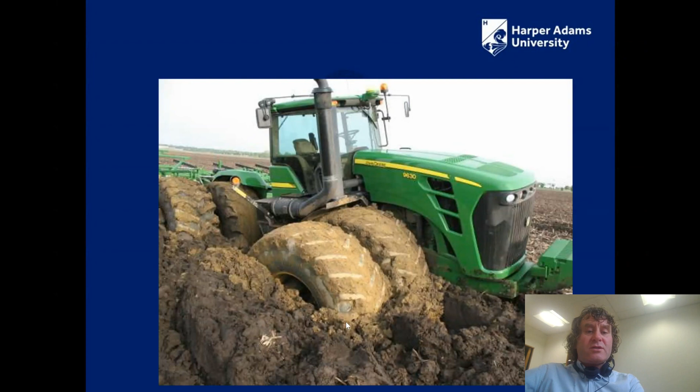Really, it's the soil, the first 20 centimeters of the soil, which are full of life and nematodes and carbon and nutrients, which are giving the plants the required nutrients in order to live and thrive, which we then eat.

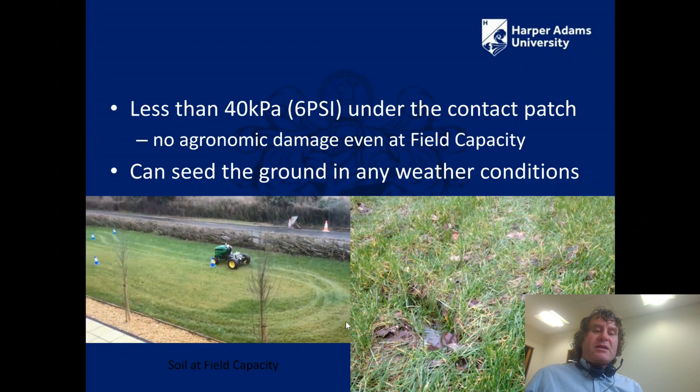So a project we started back in about 2015 was to get small light tractors. This is a lawn mowing tractor, and you can see some students on the left-hand side. They are master students who made this tractor radio controlled, which was the first step to show that it's dexterous.

The step after that would be to put on a computer system to make it drive around autonomously. And the whole idea of having no driver on the tractor is to reduce the weight.

You can see that if a person steps on a field, you've got a very flooded footprint. This is on the grass just down below. The field here is at what we call field capacity - in other words, it can't take any more water. Whereas the tire track from that tractor hardly makes an indentation in the ground. So it's not damaging the ground as much because its mass is distributed over 4 low pressure tires, and there's the reduced weight of the driver.

Taking this project a step further, some colleagues at Harper Adams made a field which was exclusively farmed by robots. Now, the people who made this project were extremely good at publicity and social media. So what they did was they really pushed the fact that there was no humans allowed in the field and that they were going to grow a hectare of crop completely autonomously. And that was the bit that really grabbed the headlines.

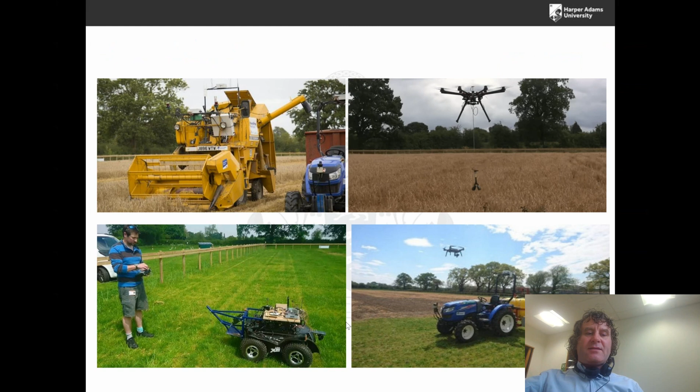Now, the technology behind all of this was actually very, very simple. So the students and the researchers used the ArduPilot system - something you can get quite cheaply to fly drones. What they did was they put an ArduPilot system onto a tractor, and then onto a combine harvester, and they demonstrated that it could drive the vehicle. So we can see video of this driving along.

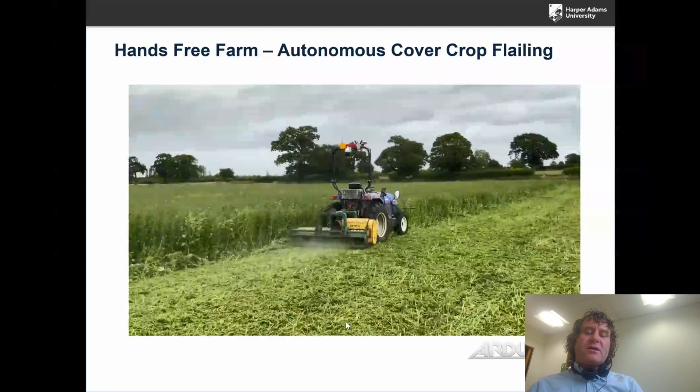Now, I wasn't involved in this project because it was very simplified. It didn't really use robotics. What they used was to take motors and put them in place of the steering, and a motor in place of the gas pedal to change the speed of the tractor. It's simply an ArduPilot system, which is using Mission Planner to navigate its way around.

It's very limited in that it thinks it's a flying drone. It can't do anything else. So if there's obstacles in the way, it can't do dynamic obstacle avoidance. It can't test if its fuel is low and do something about it. It is purely navigating. But there was a good lesson to be learned from this.

Really, most of the problems of technology is convincing the general public that it will work, and the general public is not interested in the technology behind it. They are just interested in what actually happens. So it was an interesting lesson - my approach would be to use robot operating system and to have the whole system with laser scanners for object identification and path planning, etc.

But that takes a long time. This was built up in less than a year in order to use the crop to go with the growing cycle, and it really took the world by storm. So the system was very simple, it had many limitations. I, as an engineer, only saw those limitations, but the public were convinced that robots could farm.

And you can see here that the impact was amazing publicity as well. And from that publicity, they could then go on to apply for more research grants and make more complicated tractor systems. So this is the next generation.

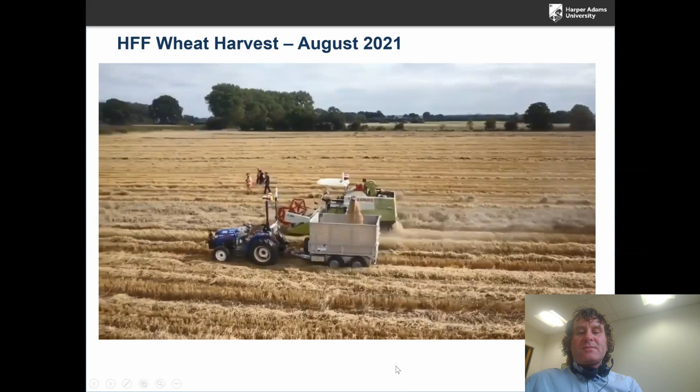They've moved away from ArduPilot, but they did use a company which created the auto-steer system, called Trimble. You can see there are two autonomous vehicles working side by side, in constant communication with each other, and you can see that it does work, and they've got more outputs.

One of their philosophies was, how can we get around the legislation? There was legislation forbidding the use of autonomous tractors because of health and safety concerns. So rather than putting lots of safety systems onto the tractor, they built a big fence around the area. Their philosophy was, let's do it now and apologize if we've made any mistakes later.

We found that legislation can really be changed by doing things anyway. If the public are on your side and enough people see it actually happening, that can be a good springboard for changing legislation. So rather than waiting for legislation to change and then doing it, get the public on board and get the legislation changed by sheer publicity.

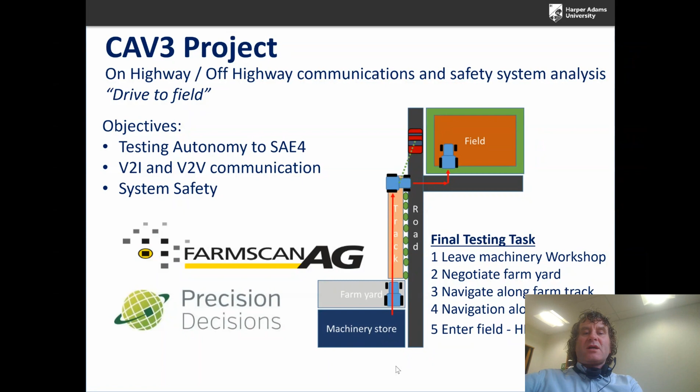That project has gone further. The CAV stands for Connected Autonomous Vehicles Project, and that has now been taken to a tractor that can drive itself from a machinery store down the road and into the Hands-Free Hectare field. You can see a short video of this vehicle moving.

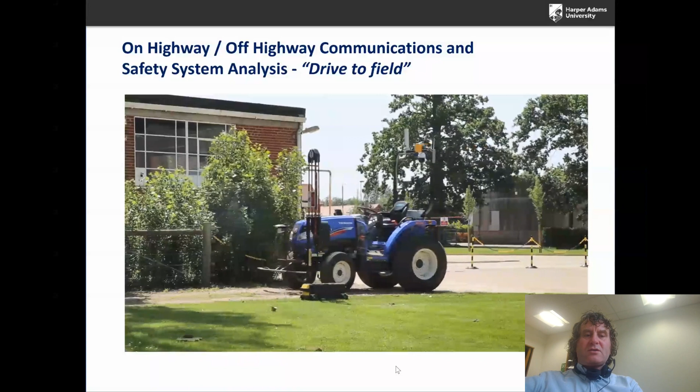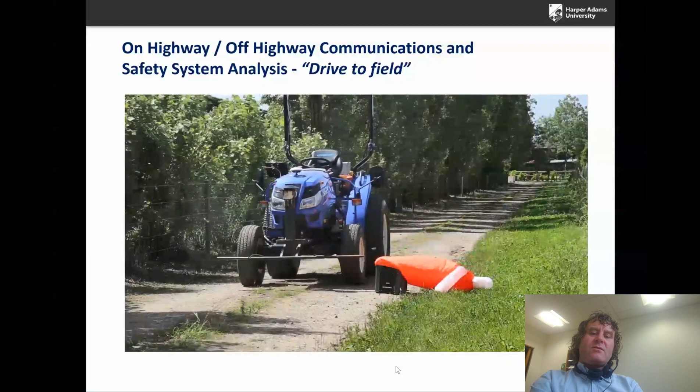Again, this is using third-party hardware and software to drive. It's using GPS points to drive around. It has RFID connections to the barriers, which raise and lower, and now it has a laser scanner as a safety system. So if there's a person in the way, it slows and then stops the tractor, and when the person is out of the way, the tractor carries on.

It's all built up in layers of safety which stop the tractor: a layer of GPS coordinate following, and a layer of implement activation. Each one is a separate system with communications to the system below it. And you can see that it can now enter the Hands-Free Hectare field by itself.

Incidentally, this field is now our agri-living lab, which I mentioned before. So we've now connected it up.

Something we're very proud of at Harper Adams is we're involved, and we've collaborated with a company called Spray Drone. The drones are from XAG in China, and we're actually running the country's first spray drone pilot course, so you can learn to spray and pilot a drone at the same time.

Current legislation stops us spraying chemicals and glyphosates from a drone in our country. However, it's not stopping us spraying water, so we can test it out with water. We can test spraying indoors as well, in our large soil hall where we can test that out.

We can also release seeds, sending them into environments which are very difficult to seed, for example on mountainsides. So that's something that's currently being used. I've just gone through the drone pilot training myself, and it's a useful qualification to have.

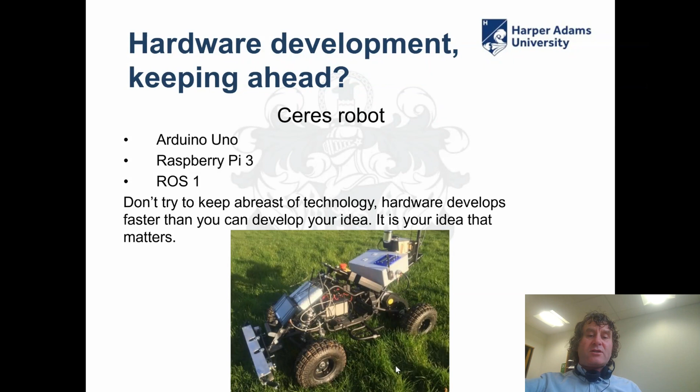Trying to keep abreast of software and hardware, if you try doing that, you won't build anything. So at one point you have to say, right, we're sticking with this technology, and that's the technology we will use.

So many of you might be thinking of mechatronics and robotics and how can we make an impact in agriculture? Well, the bit I'd like to get across in the next few slides is that machines can be very simple and do very simple tasks, and that can save the farmer and the public a lot of money and a lot of effort.

For example, if you have a spray machine and it gets windy, a driver has to stop spraying and go home. But if you have a robot which is spraying, it can sense when it's windy. If it's too windy, it can stop. If the wind dies down, at any time, day or night, when the environment is right, it can continue to spray. So it will just sit and wait rather than relying on a driver waking up.

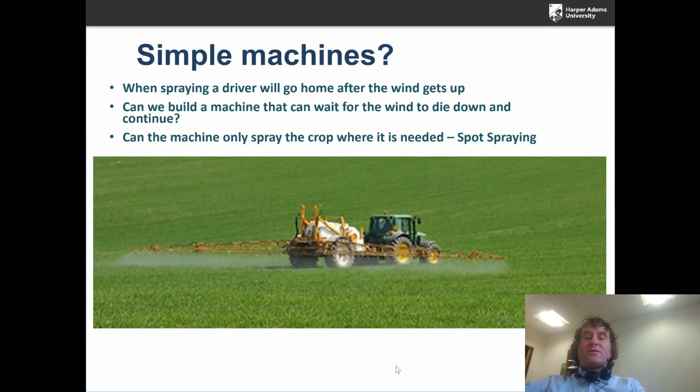I'll also talk about spraying only where crop is needed - spot spraying. If we have robots which can very accurately place items, we can have smaller robots working in swarms so they can cover a field quickly in the time that's needed. If we use very accurate GPS, we know exactly the location of where the seeds are planted.

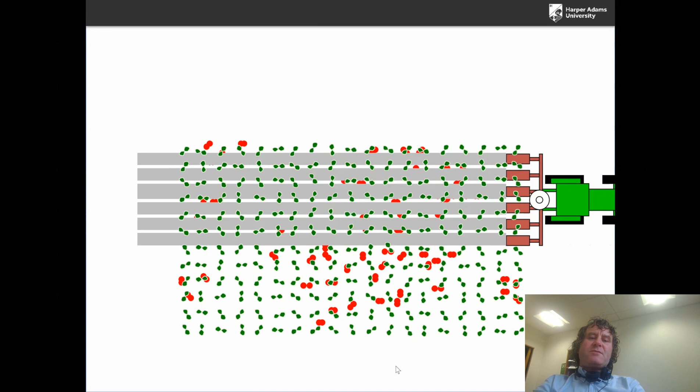When the seeds grow, we also get weeds. Those weeds are in places where the seeds were not planted. So it's a very simple task to make an automated device which can weed without needing to recognize those weeds. It just needs to weed where it knows no proper seed has been planted. In this example, it's doing inter-row and intra-row hoeing because of the accurate placing of the seeds.

Something that's been developed over in Scandinavia is Farmdroid. In the UK we have about 80 of these Farm Droids. They're solar powered. It's a very simple robot, and what it does is it very accurately places the seed. It's a very clever device because although it's simple and just moving up and down a field in accurate locations, it can also be teleoperated if it gets stuck.

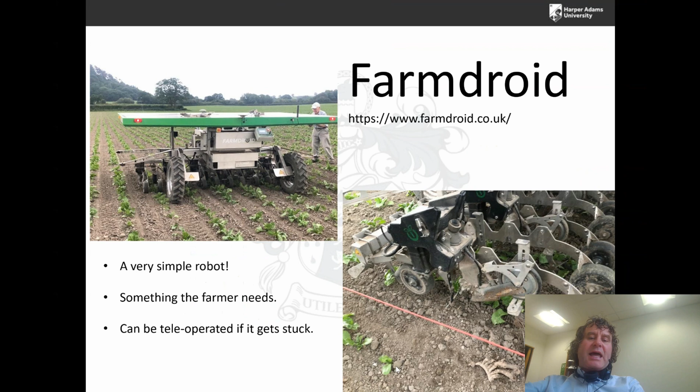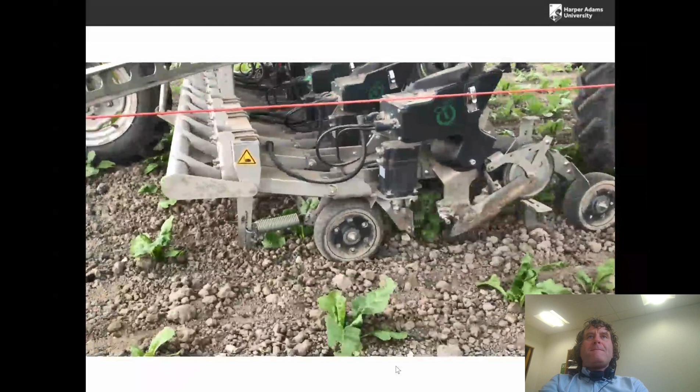So the company which builds the Farmdroid can monitor how a Farmdroid is doing, and if it gets stuck, they can teleoperate into the robot and unstick it. So one of the main philosophies of this robot is to have something the farmer doesn't have to keep going out to every couple of hours because maybe a clod of earth has got stuck in one of their implements.

So you can see here that it's hoeing in between the seeds. It doesn't actually recognize the weeds - it's just hoeing in between every seed which has been planted. It knows the location of every seed because it has a very accurate RTK GPS and it planted the seeds itself. So it's doing intra-row and inter-row hoeing as it drives along. At the end of the field, it turns around and comes back the other way, and it just spends its entire day doing it.

Robotics is a very practical subject, and we can't do everything through emulation. Many times when we're developing robots for agriculture, we have to run it over and over. Really, this is the boring bit - this isn't what we were bred to do as engineers, but unfortunately this is part of getting a robot out into market. There will be times we have to run the robot many, many times, assessing data of how it ran until we can work out why it failed.

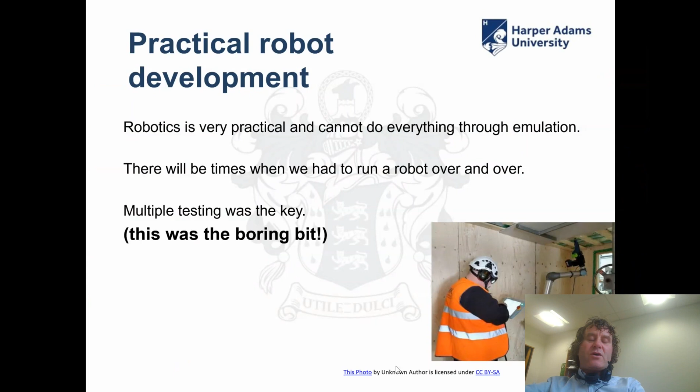It might only fail once every 50 times, but if it's failing, then it's not going to be good in a market. So multiple testing is something that needs to be factored into any robotics project. You can't build a robot and then leave it for the customer to test because they won't be interested. Once it breaks, it's broken, and the customer has lost their patience with the robot.

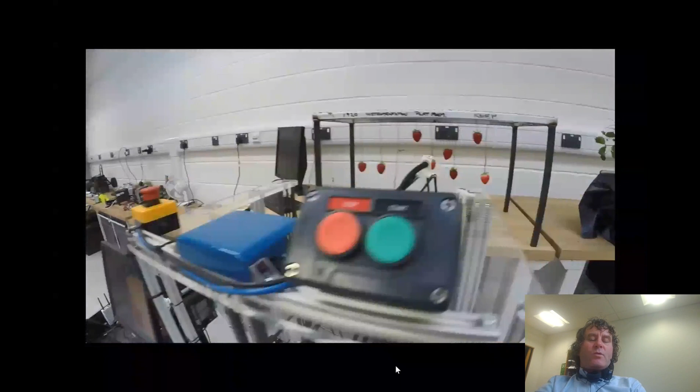Another project we've worked on is strawberry picking. What this robot will do is recognize strawberries, and it will only pick the strawberries which are ripe. We can see a video of it in operation here - it's a mobile robot with a robot arm, autonomously recognizing the ripe strawberries. But if there are any strawberries which are not ripe for picking, it won't pick them, but it will make a record of where they are.

It will tag the GPS coordinate of the strawberries which are not ripe for picking. Then in its database, it knows where they are, and it can come back a few weeks later and pick those ripe strawberries as well.

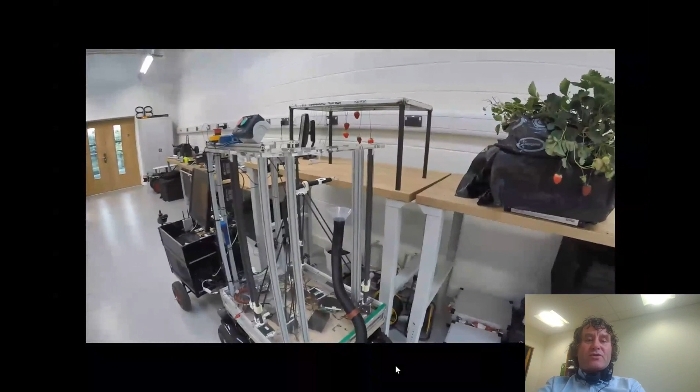It can also work right through the night, and it will treat them more carefully. The gripper was developed so the strawberry was never actually touched, only the stem was touched, and the gripper has a special cutting mechanism so it both grasps and cuts the peduncle of the strawberry at the same time.

We tested this many times. These strawberries are not real strawberries, they're actually on a little magnetic base, but it does work with real strawberries as well. We had to make sure that it would only pick the ripe strawberries, and many iterations had to occur.

We deal a lot with businesses and different companies, and something that struck me is that not every company has every expertise of engineering. I know of a company trying to develop something mechatronic, but they don't have any mechatronic engineers. So I know there's a definite need for mechatronics engineers in the world, and a definite shortage of them.

I think mechatronics engineers could be used as consultants, because a business might only need one at certain parts of its project or product development. There are companies that want to come to our universities to learn the basis of mechatronics so they can develop new components and new projects. I think that's something worth considering. How can we address that situation? I don't have the answers.

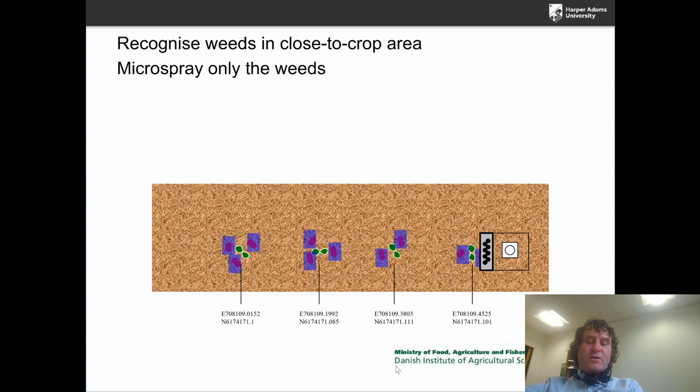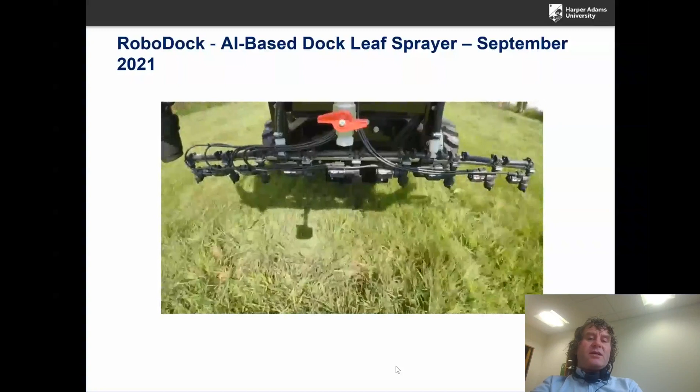Another project we've worked on is weed recognition and microspraying only those weeds. If we had a robot system that could recognize the weeds, it could microspray them. We worked with a company that needed weed recognition, and we used a deep learning system based on the NVIDIA Jetson which recognized dock leaves in grass.

It's quite incredible how it works, because it's hard to see dock leaves. They're a particular invasive weed in the UK, and they're green while the grass is green too, but we found the AI system was very accurate in recognizing this particular dock leaf. We then put it onto an autonomous mowing robot and used the spot spraying system.

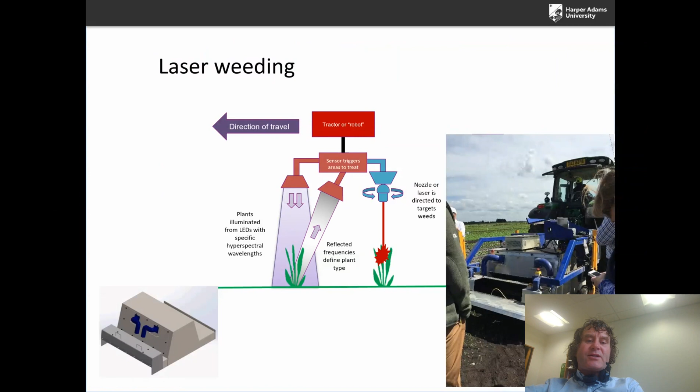Another system we've used for treating weeds is a purely organic system which recognizes the weeds by lighting them up and then attacks them with a laser. I'll show you a short video of this in operation as well.

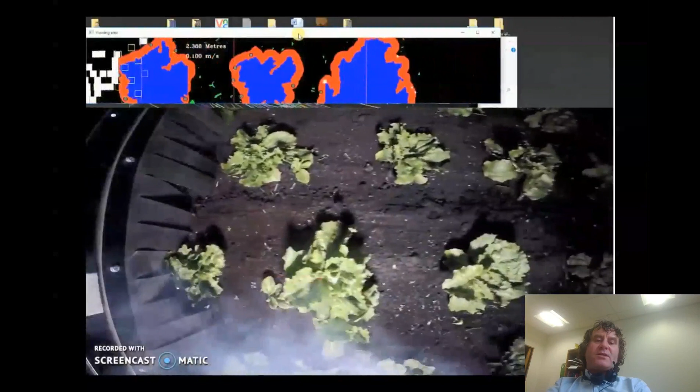What we've got is lettuce, which is a high value crop. In between the lettuce we have the weeds, and the weeds are being recognized by the system. At the top you can see the cartoon image of the lettuce, and the laser is on a gimbal, which is burning the weeds that are very close to the crop.

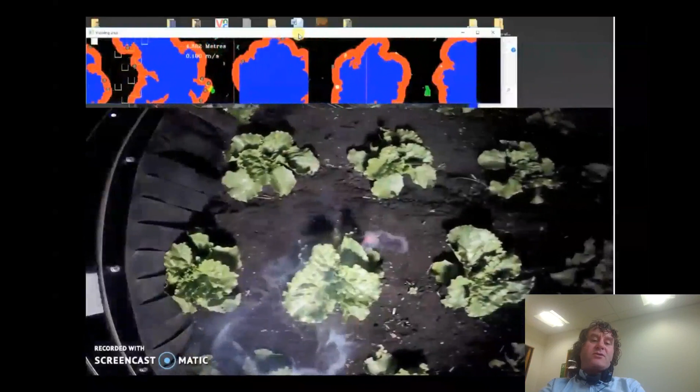We treat the weeds which are outside of that region with a small amount of spraying. The idea is that no spray goes onto the crop, and the weeds close to the crop are only treated by laser.

Something I'm very passionate about is the idea of mechatronics education. I've developed this robot, which I'm speaking about at the conference, and my belief is that a robot system should be very easy to set up - you should be able to get it out of a cupboard and switch it on straight away.

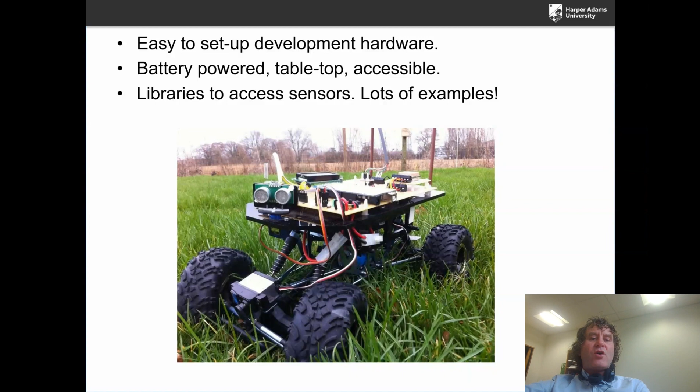So I've made it battery powered. It sits on the tabletop and it's accessible. I also believe that people don't necessarily want to learn how to interface sensors or drive a motor, so we should provide libraries which allow people to access more complex sensors without having to learn exactly how they work. Then the focus can be on developing the algorithm for the self-navigating robot and doing higher level tasks.